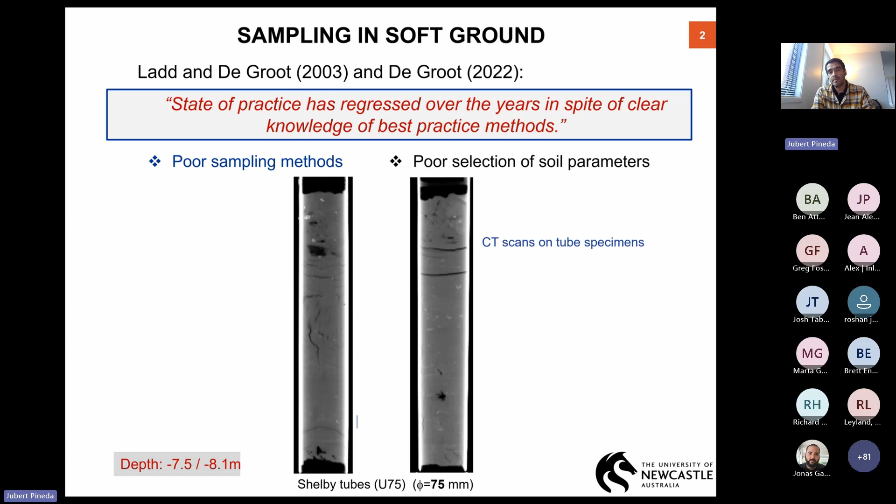But because we are testing these types of materials, which are really bad and highly disturbed, the soil properties we obtain from the laboratory tests we normally run are not good quality. They are not representative of the in situ material.

So if we focus on the sampling techniques available, we have two main trends. We can have block sampling if ground conditions allow and the sampling depth isn't too deep, or we have tube sampling techniques. Within tube sampling, we have two main samplers available: the Shelby tubes, or open samplers, and fixed piston samplers.

In terms of block sampling, we have trial pits, if possible given excavation constraints, and also block samplers.

Before moving forward, I'm going to give my very first conclusion for this webinar. Shelby tubes are not by any means a good option for sampling soft soils. I strongly do not recommend the use of Shelby tubes, and I know that sometimes this sounds a little too strong in practice, but I will try to give proper scientific justification for that statement.

And then I will try to promote the use of fixed piston samplers. I'm not sure how common fixed piston samplers are in regional drilling jobs, but this is becoming quite standard practice in Australia as well.

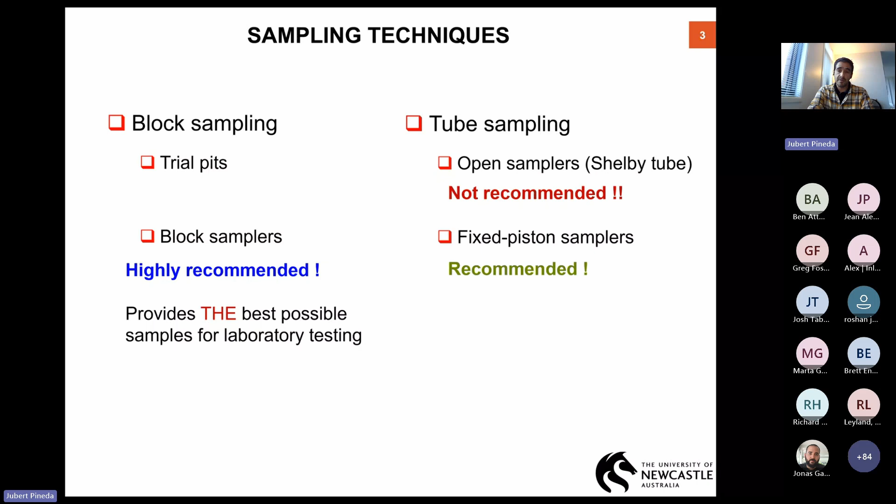And if possible, we do have the possibility to use extremely high quality block samplers. I will highlight the capabilities and operational principles of one option available at the University of Newcastle. I'm going to start with the block sampling techniques.

Now this is the option: the reduced version has a diameter of 180 millimeters. To use it, you need a 200 millimeter borehole. The height of the sample you can get is up to 250 millimeters, from which you can get several triaxial and oedometer samples for laboratory testing. The maximum depth where this sampler has been used is 25 to 30 meters, just because of the drill rig constraint.

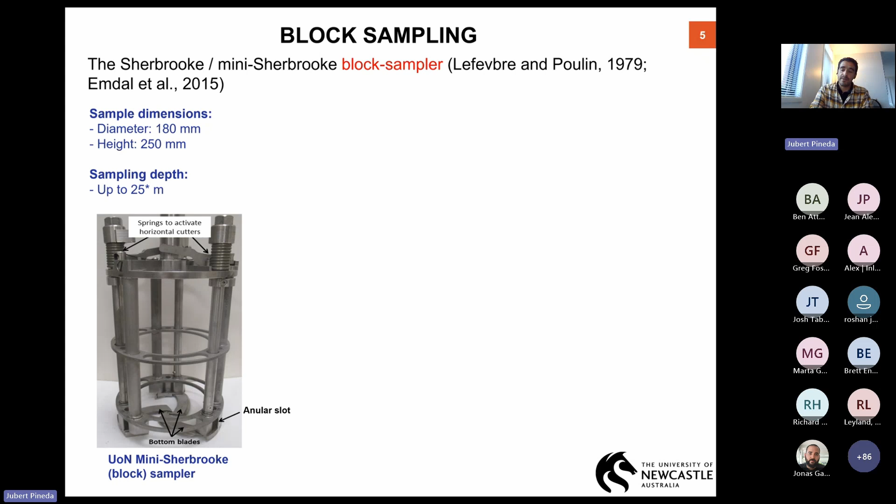But there is no reason why we could not reach deeper depths. How this sampler operates: as I said, we need a 200 millimeter borehole. The sampler itself is composed of a metallic cage you can see here. They have annular slots or horizontal cutters on this side, and at the base we have three bottom metallic blades, horizontal blades.

In order to use this for sampling soft soils, the first thing we have to do is open the bottom blades, allowing the natural ground to get inside this metallic cage. To do that, we use springs located at the top of each column, which let us rotate those blades before the sampler is connected to the drill rods.

Once the bottom blades are open, we connect it to the drill rods and lower the sampler down to the required sampling depth. We have to rotate it at normal speed, though it's preferred to rotate the mini Sherbrooke at very low speed, which is controlled by the drill rig.

So the rotation starts and the annular slots start to carve laterally the soil around the bottom of the sampler until we reach the maximum height that we can reach with this sampler, which is 250 millimeters.

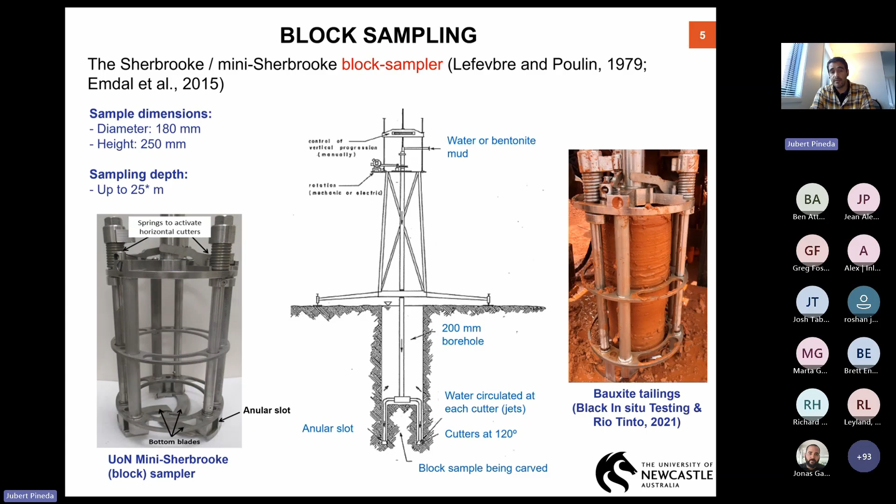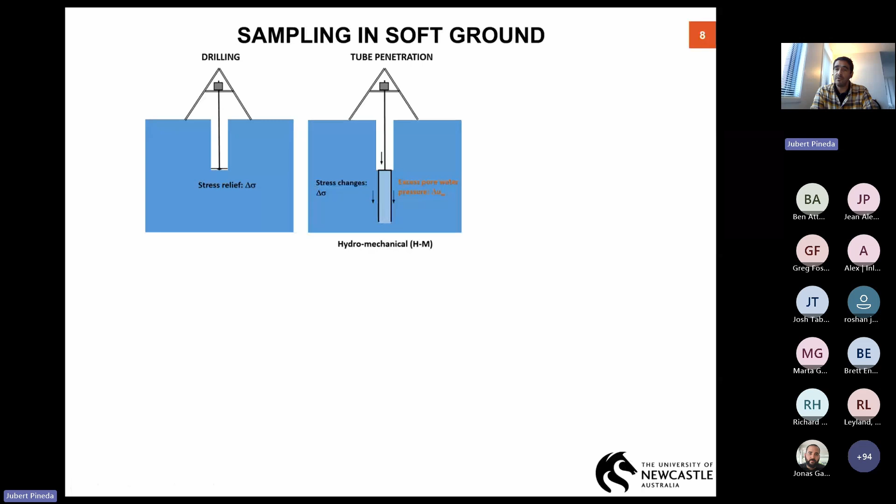Then we normally push a Shelby tube into the ground, and this push must be quick because we want this operation to remain undrained. Therefore, because it's undrained, there is no volume change, but there is a potential excess water pressure that may or may not induce sample disturbance inside.

After that, which in my opinion is one of the most complicated operations in this technique, we need to retrieve the tube with the sample inside.

If we use Shelby tubes, what happens is that when we try to pull the tube sampler from the ground, we create suction at the base of the tube, because we need to cut the base of the soil inside the tube and disconnect it from the natural ground. That pulling induces suction at the base, which induces water redistribution inside the soil. Therefore, we are changing the natural water content and the density in our specimen, and we don't know by how much this suction is affecting our soil quality.

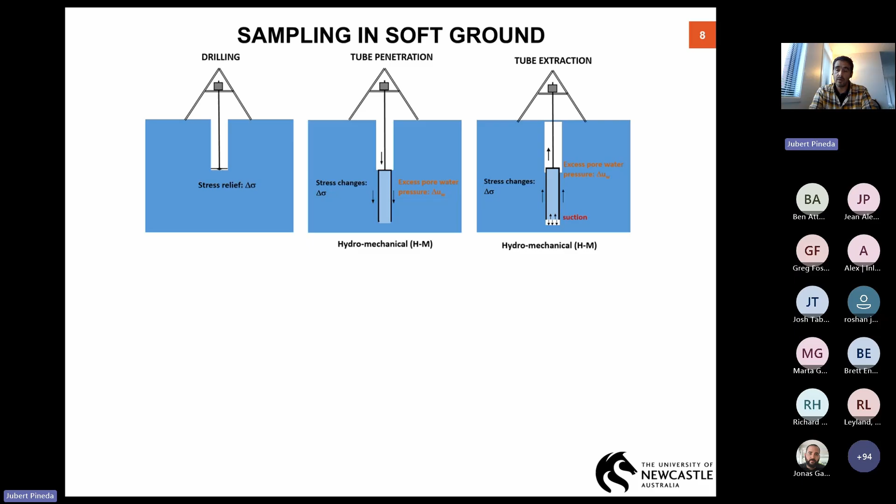But the wax must be liquid or semi-liquid, which means it induces a thermal gradient that travels from the tube's two ends towards the center of the sample, most likely inducing excess water pressure if there is no volume change. If there is volume change inside the soil, because of cracks or cavities, then we also have soil deformation, which changes the density of the natural soil we want to test and from which we want to obtain soil parameters for geotechnical design.

Transport and sample storage: we normally promote keeping the tubes vertically aligned, not horizontally, in order to avoid the natural soil inside the tube from flowing.

We have seen quite a few examples of tube specimens transported and shipped to the lab in a horizontal position. When you try to open them up, they flow like toothpaste, because there are cavities and the soil is allowed to move inside, and that's not good. This also induces negative changes in the natural structure of the soil.

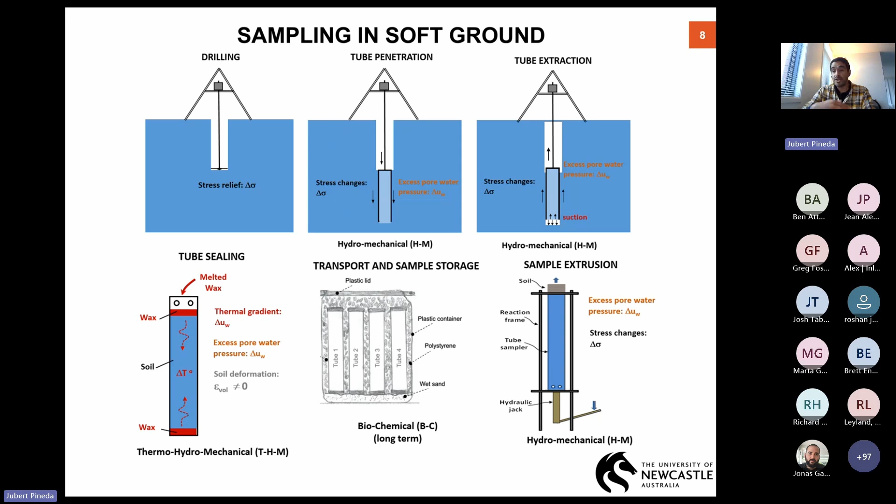Why? Because when we use the hydraulic jack, we need to overcome the horizontal and vertical friction between the soil and the wall, which normally requires quite a lot of force, and therefore we have to compress the natural soil in order to push it out. That is not a good procedure whatsoever. So I will discuss a few options later on.

So what is happening when we run a tube sampling campaign? This is the interpretation from the late Professor Charles Ladd and Don DeGroot in 2003. The soil at in situ state is located in position 1. Under ideal conditions, if we were able to test the soil in situ without taking any sample, under triaxial conditions, running a K-naught consolidated undrained compression test, without taking the soil from the ground...

If we imagine we could place a big triaxial machine inside the ground and run the undrained triaxial test, the stress path followed by that sample would go from point 1 to point A. We know that because natural soft soils are slightly over-consolidated, this generates positive excess pore water pressure during undrained shearing, and therefore the mean effective stress reduces, and the maximum deviatoric stress or undrained shear strength we could get would be indicated by point A. However, we can't do that.

So what we normally do is we basically drill a borehole, then push the tube sampler inside the ground, and we have to pull the sampler from the ground, then seal it, transport and store that, and then extrude the soil from the tube in the lab, and then prepare the sample for laboratory testing.

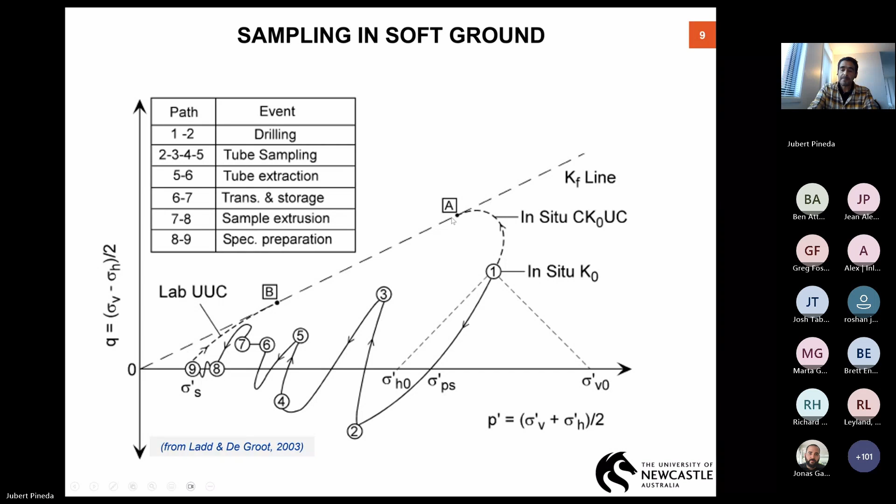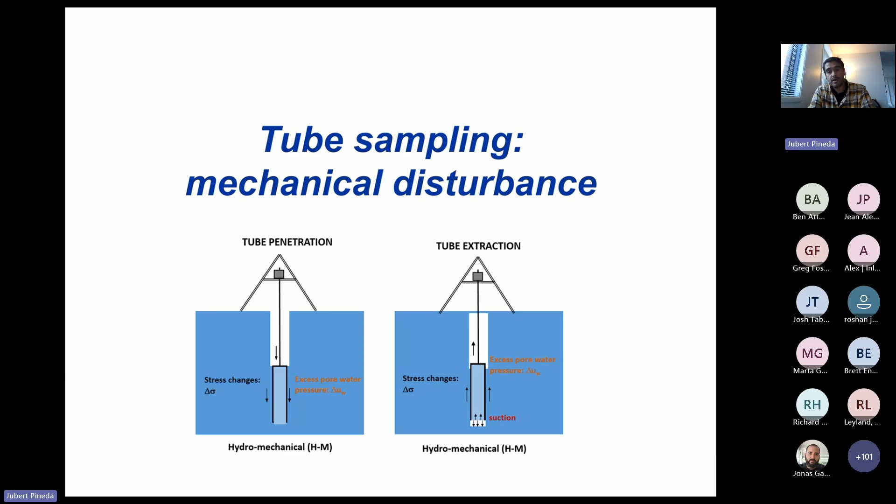So let's discuss briefly what is the disturbance coming from different sources. The first and most important disturbance identified is the mechanical disturbance due to the penetration of the tube sampler into the ground. This is a really old problem in soil mechanics. I'm not saying this is something we've recently discovered, by no means. This was originally discussed by Hvorslev, potentially the Bible of in situ testing, back in 1949.

So Hvorslev and many other researchers came up with a 500-page book or guideline, and they proposed geometrical descriptors in order to minimize sample disturbance in practice, to improve the reliability of the soil properties we normally obtain from those samples. So they proposed a few descriptors.

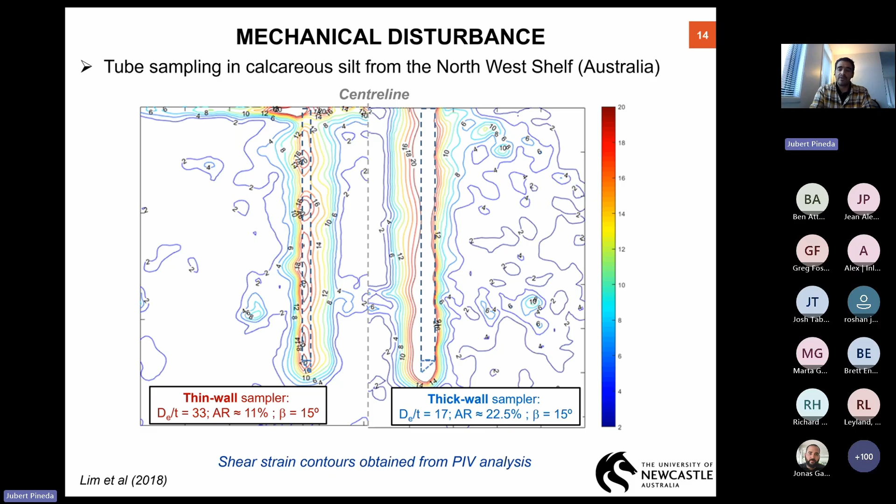So this is already bad enough, and practitioners should try to move on towards a different technique. But this is just during the penetration.

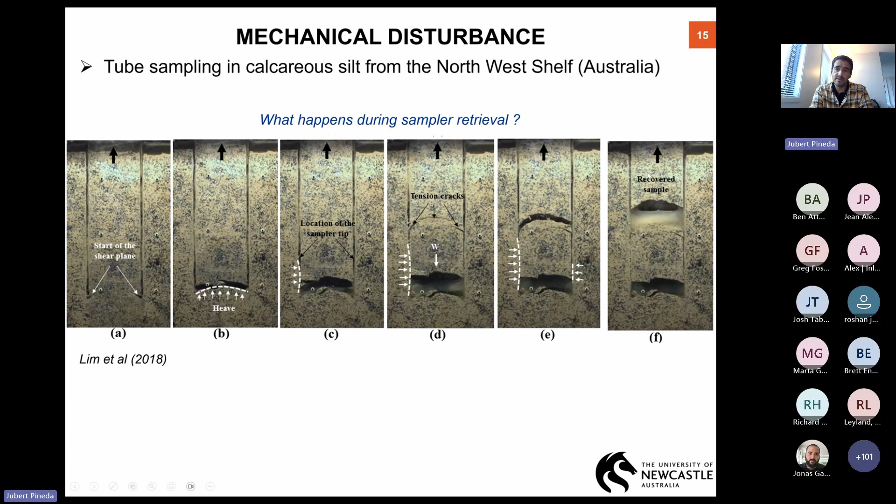So that creates some tension cracks. The tip of the sampler is now here, and because of the self-weight of this part of the tube, we are losing this bottom part of the material. This is the recovered sample that we got and we are going to test. So by no means are these Shelby tubes or open samplers a good technique.

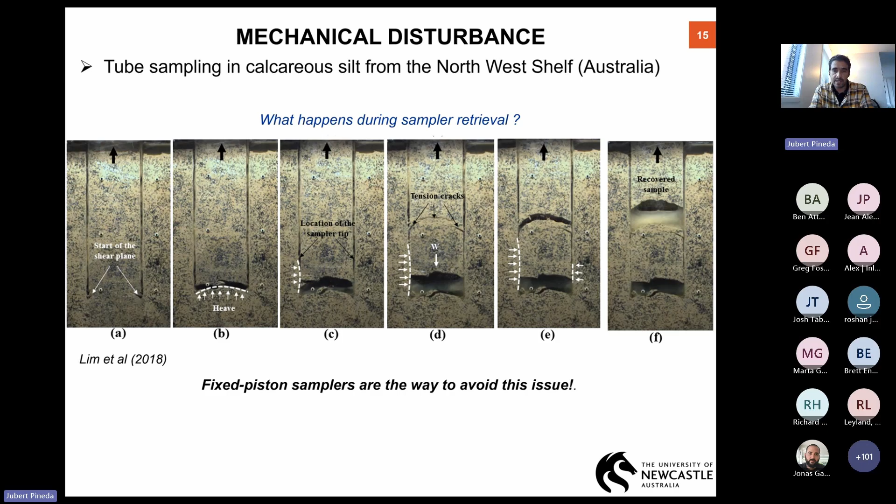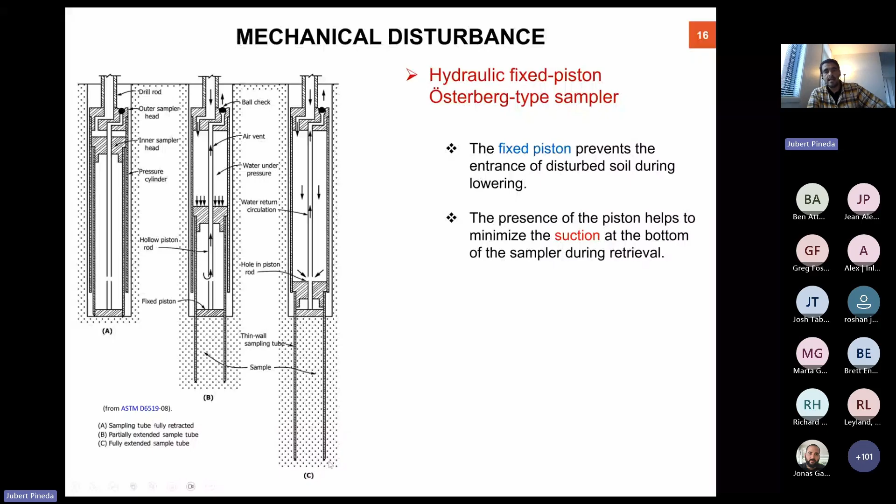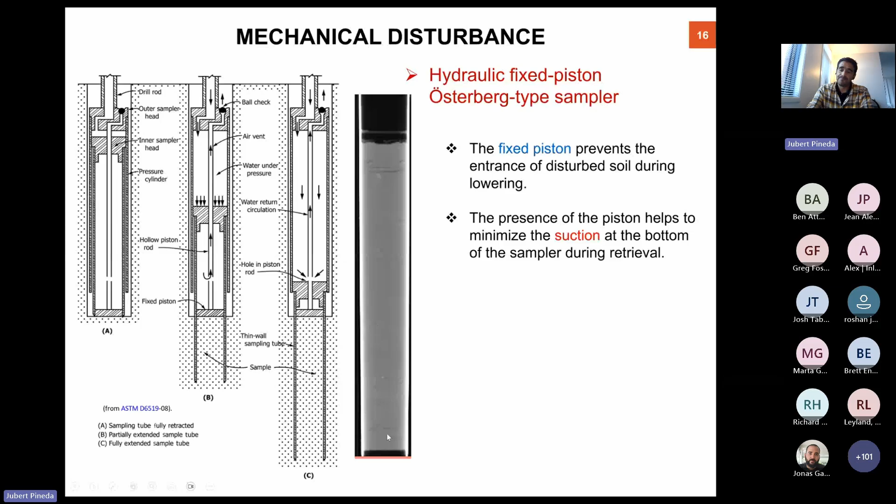So there is no way we can reduce this sampling disturbance to zero, but using fixed piston samplers, we reduce the disturbance in the central part of the tube, and also only get some disturbance at the top and bottom ends, which is quite good. Just briefly, what happens after retrieving the soil and then sealing the sample?

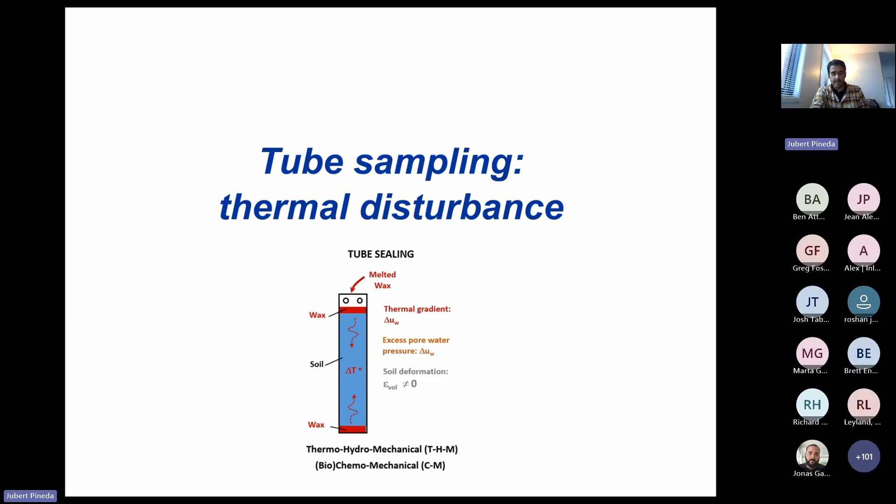We normally use wax, and we have studied carefully the influence of waxing on sample disturbance. This is a photograph I took in Spain, but I have seen similar stuff in Australia and also in different countries in South America.

When we normally use wax, we need to melt the wax down and then pour it to cover the top and bottom ends. This photo on the right shows liquid wax. The operators in this case decided to include some plastic bag in order to separate the soil from the wax, which is not bad.

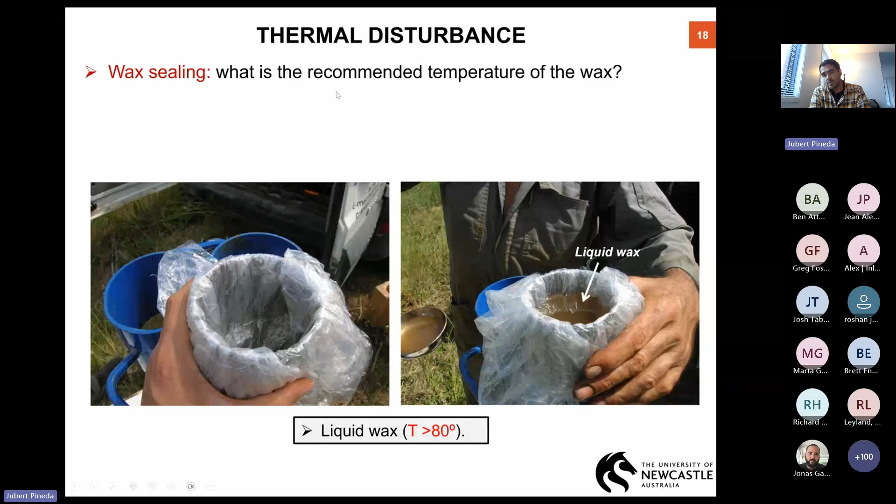Something I noticed was that the temperature of the wax was around 80 degrees or higher, which is quite large. So the question is, what is the recommended temperature for the wax before using it for sealing tube specimens? If you check the International Manual for Sampling of Cohesive Soils from 1981, or the Australian Standard, there is no recommendation whatsoever about that. Nobody pays attention to that.

There is a recommendation for the temperature of the wax in the ASTM standard, and in the book by Clayton from 1995, which is quite useful. They recommend that the wax should have a maximum temperature around the melting point, very close to it, which is 55 to 60 degrees, not 85 or 90 degrees, because that's too liquid, too hot, and it creates a lot of thermal gradients.

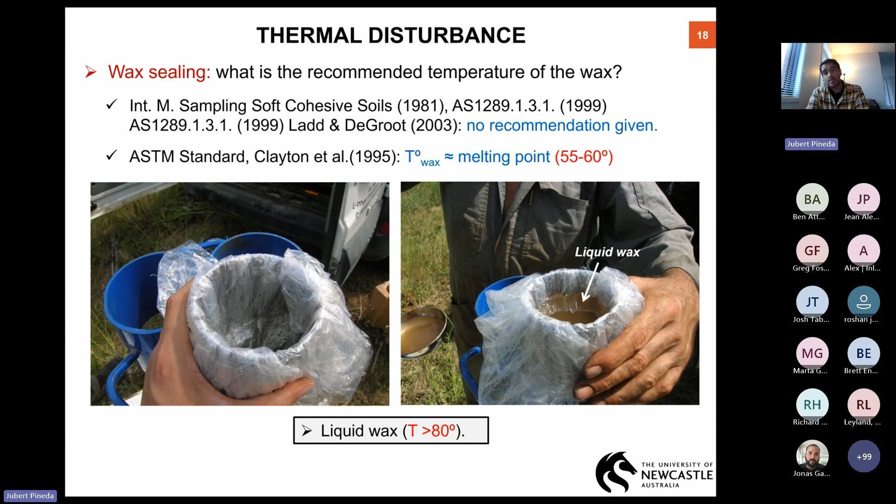We have done some experiments in our lab to see what happens inside the soil when we wax the tubes. We went to Ballina, took some additional tube specimens in Ballina clay, and then cut them into halves. The maximum length for this sample is 250 millimeters, basically half of a standard Shelby tube, if you want to call it that.

We waxed it under controlled conditions, putting a cake of wax of 30 millimeters max. Then we installed some sensors at the base, pore pressure sensors called UW4, and thermocouples to monitor the temperature inside the soil, as well as thermocouples attached to the tube wall. We also installed three tensiometers, UW1, UW2, UW3, located at different depths in order to see what happened.

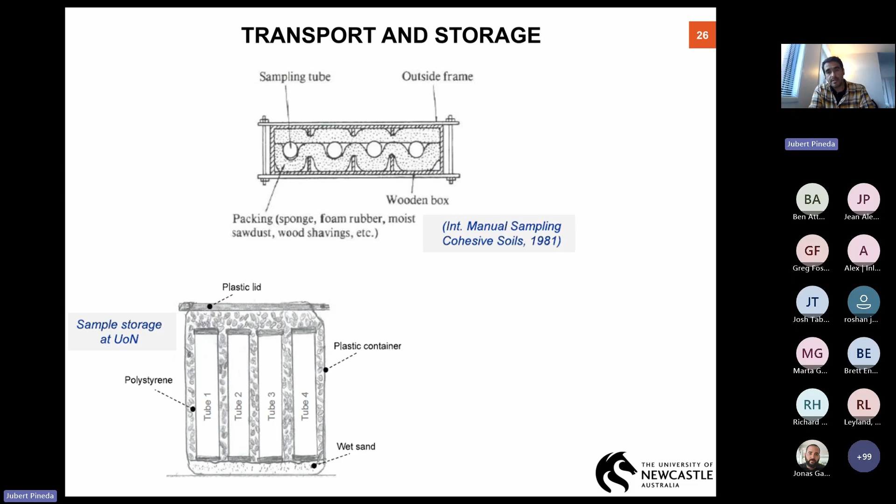So a little bit more on sample preparation. Sample preparation is also something that is overlooked, in my opinion. We normally ask technicians to take care of that without checking that the procedures are useful and may produce reliable specimens.

We normally slice our tubes. We don't recycle our tubes. This is something that sometimes is a little bit shocking for practitioners, but it's the best way to prevent additional sample disturbance. As you can see in these photos at the bottom of the slide, we slice the tubes using a mini grinder to just cut the tube.

If we need to run a triaxial test, and the triaxial sample is 50 by 100 millimeters, then we cut 150, 160 slices from the tube. To cut the tube we use the mini grinder, and then we use the wire saw to cut the soil inside. You see two examples of this process, and we also use stainless steel tubes all the time.

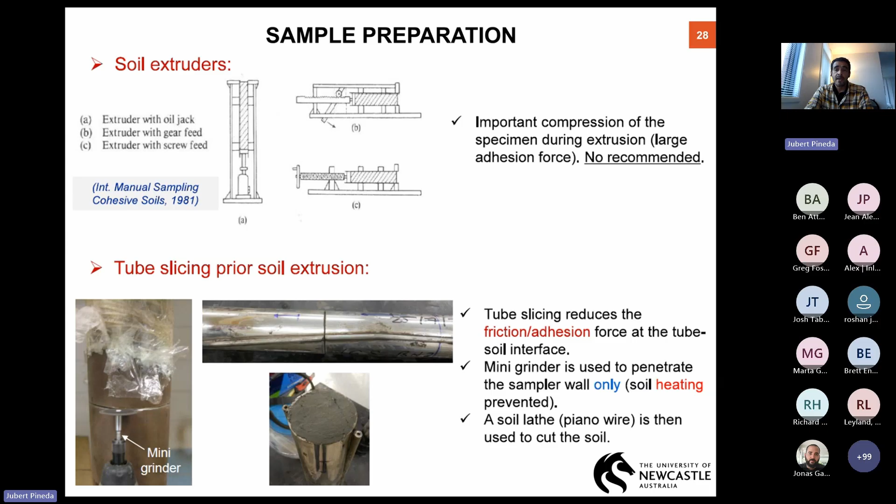We don't use this one - at the bottom left-hand side is a rusted, non-stainless steel tube, and this was a test that we did on purpose in order to check the chemical reactions induced by using those tubes. So once we have our slice ready, we need to push out the soil.

At the bottom you see what we have done in Ballina, our test on Ballina clay, because this material is quite soft, and if the tubes are not really, really old, the soil hasn't developed any chemical reactions or bonding between the soil and the tube. Therefore you just need to put a small plate, a piston at the base, and then push a little bit with your hand, and the sample will naturally stay there, and you'll be able to slide down the tube without any problems.

In the example at the top of the slide, this is more for medium to dense silty samples from Barcelona. In these cases the pre-consolidation stresses are higher than 200 kPa, and the soil is quite stiff, so we had to produce or design this extruder system, which is very simple.

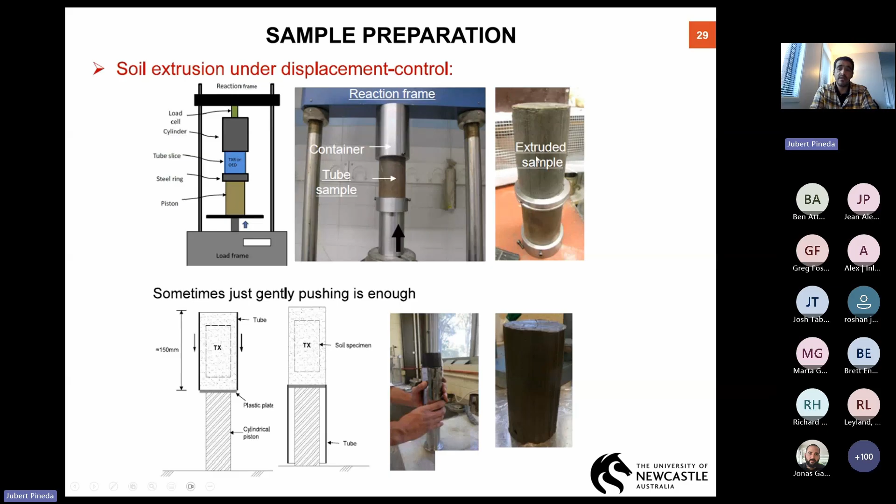It's just the slice - we put it in the middle, we have a piston, and then we just use a load frame in order to push out the sample, and we maintain it in a container, which is just an external tube that holds the sample in place. So this is a photo of a sample that we have extruded with this method. In that way, we minimize further the potential disturbance due to sample preparation.

MIT back in 2003 proposed this method, which is used after slicing the tubes. You can use a wire saw or a hypodermic needle to penetrate into the soil and break down all the bonding between the wall and the natural soil. You can use the needle alone to break these bonds, or use the needle and then the wire, rotating it to break down all this bonding.

That method works. We have used it a few times for shorter specimens, but for triaxial samples, it's very difficult to maintain the alignment of the hypodermic needle without cutting the soil. So we have decided not to use this on standard testing procedures here, but it's also useful if you have the right tools to do that.

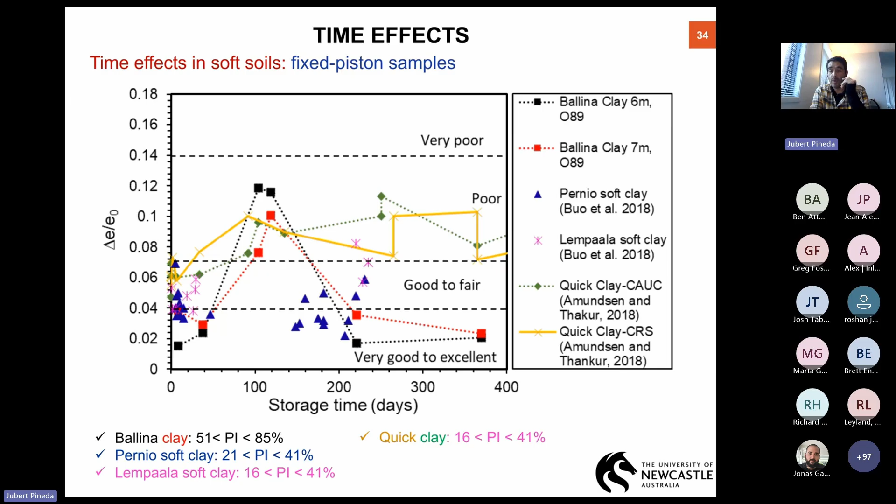If your soil is low plasticity, like the ones you can see in this photo, we see results from quick clays in Norway, in Sweden, and also soft clays in different places. The trend for storage time to induce an increase in this ratio delta e divided by e0, which is the sample quality index I'll explain in a minute, is basically more important in low plasticity clays. If your sample is high plasticity, you can store it properly and test it after even 1 year or more without too much change in the mechanical properties previously mentioned.

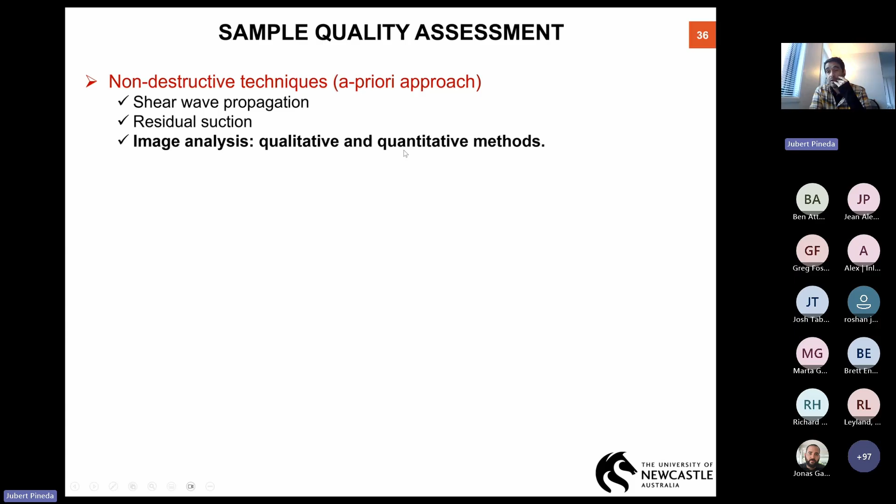How can we evaluate sample quality - this is potentially one of the key messages of my talk today. There are 2 main trends: non-destructive techniques, which are good because we want to check if our sample quality is good enough before doing any test. I'm going to highlight only one, which is the image technique for qualitative and quantitative analysis we have developed at the University of Newcastle based on CT scans.

But the more standard procedure is based on mechanical tests. These tables basically summarize the methods you can use in practice. The first table on the left is the original procedure proposed by NGI based on volumetric strain. I'm going to discuss briefly the second table on the right-hand side. People from NGI, Tom Lunne and co-workers, proposed an index, a sample quality index, which is basically delta e divided by e0.

We need to quantify how much change in void ratio is required to recompress the soil from 0 kPa, after putting the soil in the equipment, to reaching the in situ vertical stress. If we can quantify this delta e, the void ratio required to recompress the sample to the in situ stress, and normalize it by the initial void ratio of that sample, we can classify our sample quality into 4 main categories, depending on the OCR.

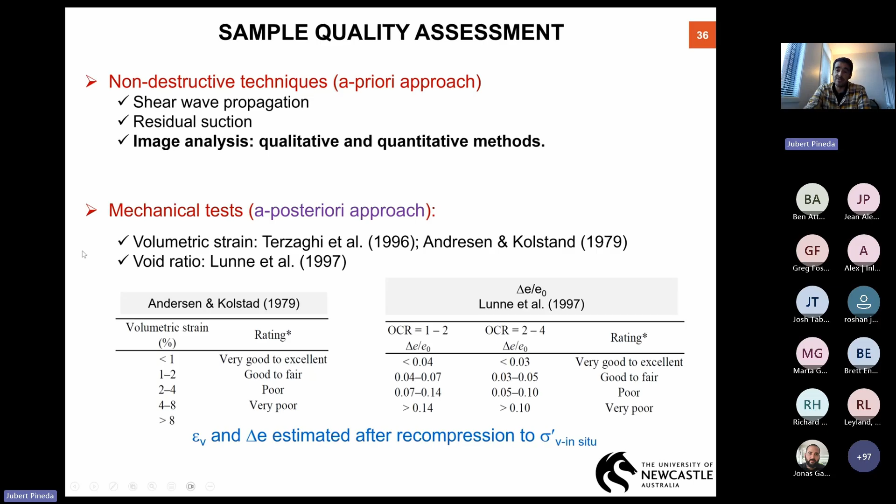If our samples have OCR 1 to 2, and this ratio is lower than 0.04, the sample classifies as very good to excellent. If this ratio ranges between 0.04 to 0.07, the sample is good to fair, which is basically good enough for mechanical testing. But if this ratio is higher than 0.07, your sample is bad to really bad, so you should not use those results for design. That's what you get in practice, and this method works quite nicely. The main problem is that you have to run the test before and after - only then do you realize if your sample is good enough or bad.

This is an example of using that method. In Ballina, back in 2017 and 2018, we took specimens using the Sherbrooke sampler, the block sampler. We used the fixed piston sampler in red. We used two different samplers: a free piston sampler, which is the P100 in black, and then the standard Shelby tube, 75 millimeters.

You see the compressibility curves from the oedometer test. They are far different, particularly between the Shelby tube, which is this gray line, and the other samplers. The stars indicate the estimated pre-consolidation stress, and you see that the block sample and the fixed piston sampler give you more or less the same pre-consolidation stress. The P100 gives us lower, and the Shelby tube gives us a value which is lower than the in situ stress, which is not possible.

If we derive this compressibility curve, because this is a constant rate of strain test, we can get the evolution of the compression index with stress level. You see that the compression index, because of the S shape, is not linear for the block and for the fixed piston sampler, it's highly nonlinear in this part. You have a CC that reaches values up to 3 in the block sample, up to 2.25 in the fixed piston sampler, and only 1.25 in the Shelby tube.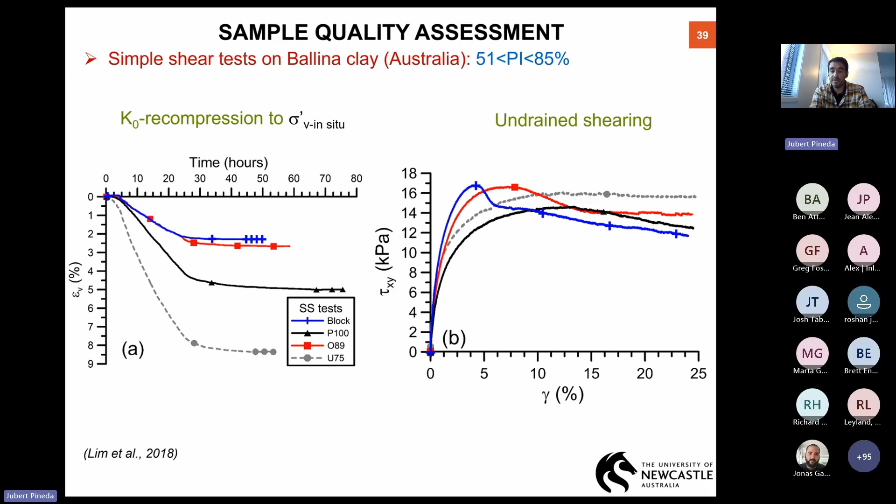But then when you shear it, the peak values under undrained shearing are not that different. But this is a potentially misleading result. The reason is we have more or less the same tau peak between the Shelby tube and the block and the fixed piston. The reason for this similar value is because the sample has been recompressed to the in situ stress. If you don't recompress your Shelby tubes, you are going to get much lower values under shearing. So recompression is definitely a good option, but still Shelby tubes should not be used because they don't reflect the real soil response.

So we have used this index from NGI, delta e over e0, for all these samples that we have tested. This is based on the pre-consolidation stress. According to this index, the only two samplers that provide good quality, excellent quality samples are the block sampler and the fixed piston. The free piston is more or less good in this case, and the Shelby tube gives us very poor sample quality.

The M modulus, the oedometer modulus, the same thing. Only the block and the fixed piston give us high quality specimens, and the Shelby always gives us very poor sample quality. In terms of the simple shear, more or less the same, the Shelby tube gives us poor sample quality.

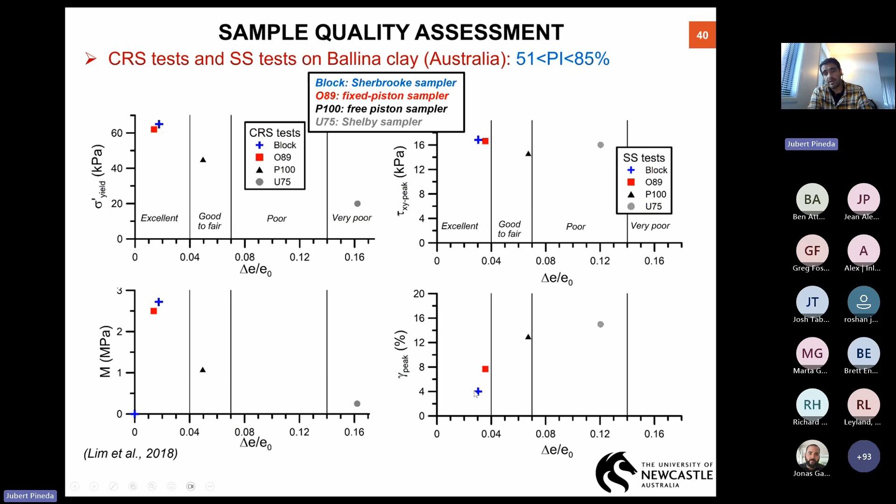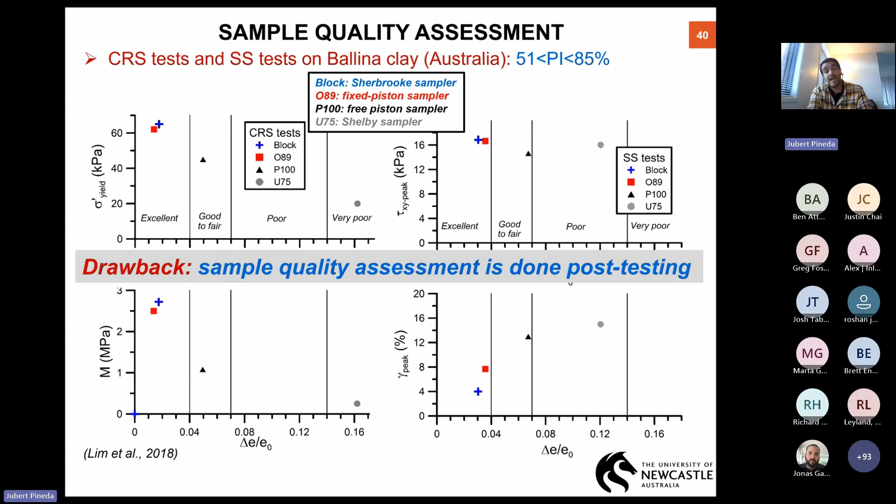The main problem with this method is you need to run the test, and at the end of the test, you realize if everything you have done is good or bad, which is definitely not good. So that's why we are proposing a different method.

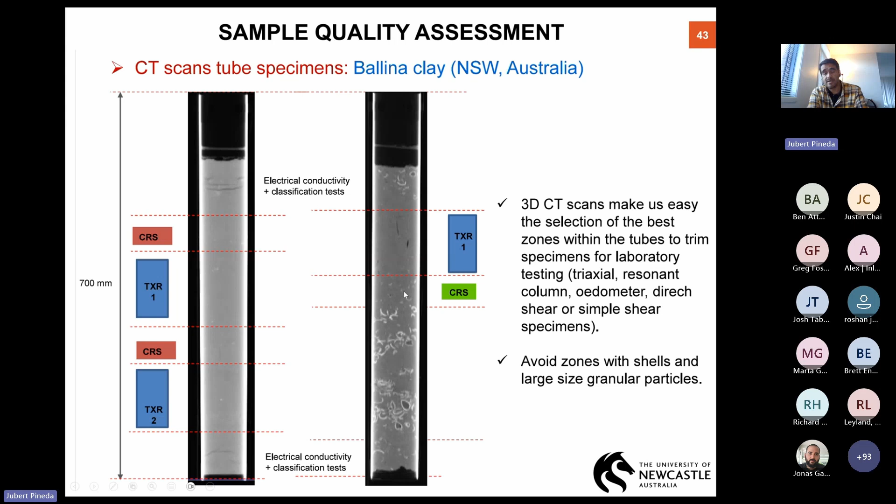So we have the CT scan, and then we decide where we can trim samples for oedometer test or CRS, and also triaxial test. We can also detect the presence of shells or cobbles or any other stone that you cannot test in the lab. So for this tube, you decide to run only one triaxial and one CRS, that's it. The other part of the tube cannot be used.

What is the implication of sampling disturbance in geotechnical practice? I'm going to use one of the simplest examples we have. This is part of Geomechanics 1 or any geotechnical soil mechanics 1 course: the settlement analysis of embankments on soft ground. We'll keep it as simple as possible.

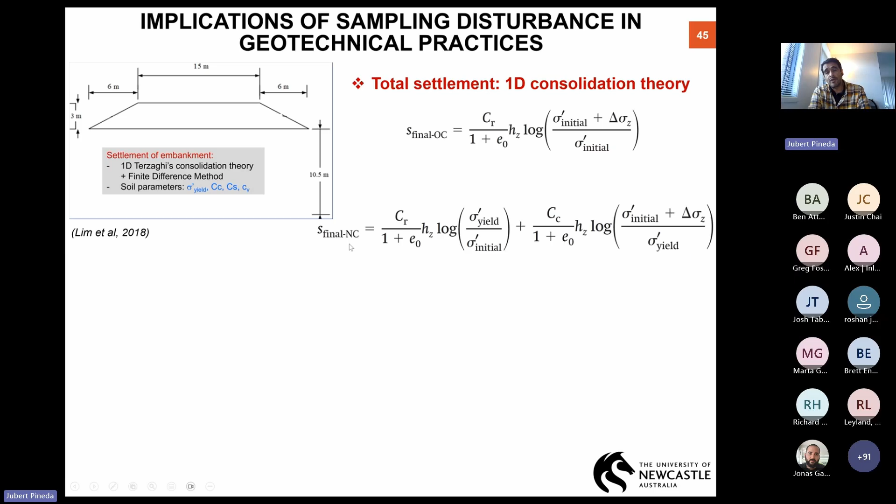To analyze this in an Excel spreadsheet, you only need to use 1D Terzaghi consolidation theory, and then potentially finite difference method to calculate the excess pore pressure. If you check Terzaghi's consolidation theory, these are the two equations you have to use. The total settlement for over-consolidated soil is given by the equation at the top, and the total settlement for normally consolidated soil is given by the equation at the bottom.

If we use the finite difference method to estimate the evolution of pore water pressure, that can easily be typed in an Excel spreadsheet. Then we have this equation where we have the parameter beta and the Cv as input parameters from the soil. This analysis is very useful in Australia because we construct embankments for roads and rails all the time, and this is a really simple way to do it.

So we need to obtain 4 parameters from the lab, and I haven't discussed creep here. I'm not going to include creep, but C-alpha is also a key factor. We need the recompression index CR, the pre-consolidation stress or yield stress, the CC, and the Cv to calculate the pore pressure.

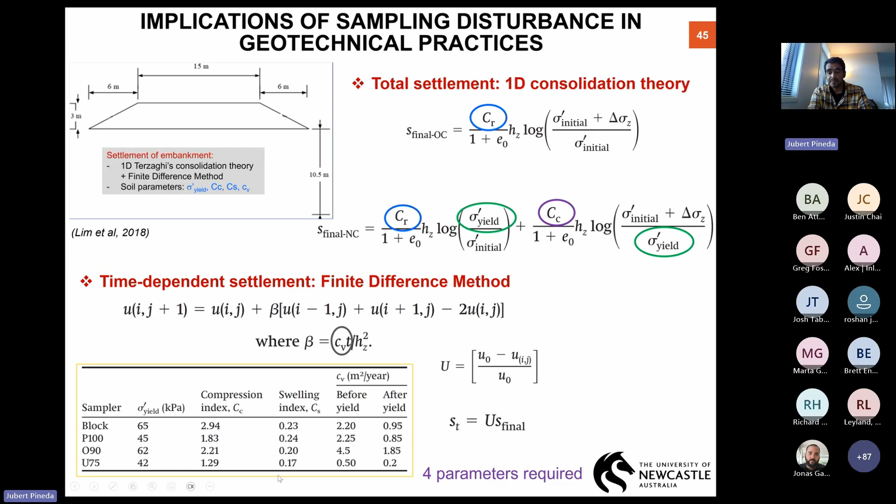So what we did back in 2018: we collected those numbers from the tests I explained before, done on block specimens, on free piston sampler P100, on fixed piston sampler O90, and the Shelby tube U75s. You see the numbers for each property change because the sample quality is different. But we did this analysis to calculate the estimated settlement based on those parameters.

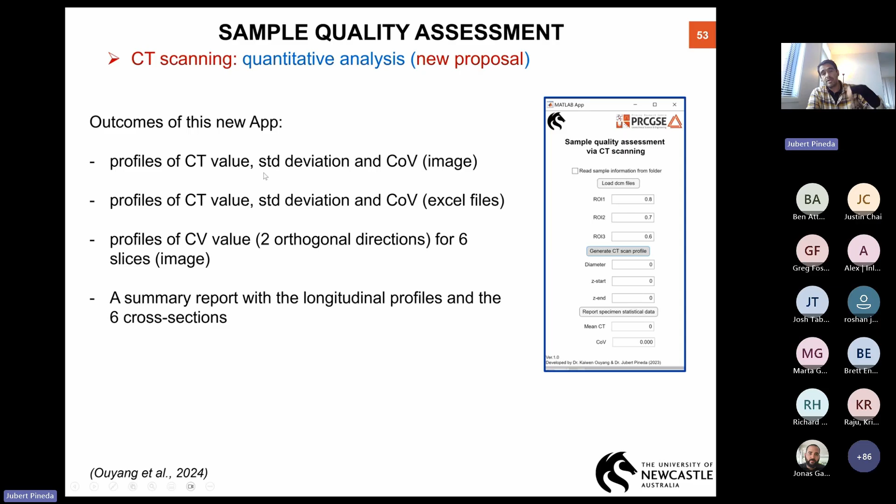If you use the app, you have the possibility to get profiles that you can download and plot yourself, and include in any report you want to provide to the client. But how do we know that this works?

Remember I discussed a few minutes ago the index proposed by NGI, which is delta E by E0. We did all this analysis long ago for all the tests we've done on Ballina, and we also did all the CT scans.

So the method we are proposing is a priori, meaning you don't need to wait until the end of the test to realize your sample is good or bad. The coefficient of variation can tell you before testing whether your sample is good or bad quality for testing.

We now have an agreement with our CT scan facility in the School of Health at our university to run CT scans for commercial purposes. So if we have a client interested in checking the sample quality of tube specimens, the client can ship the samples to us, we'll run the scan in our scanner here, and then ship the samples back to the client for testing.

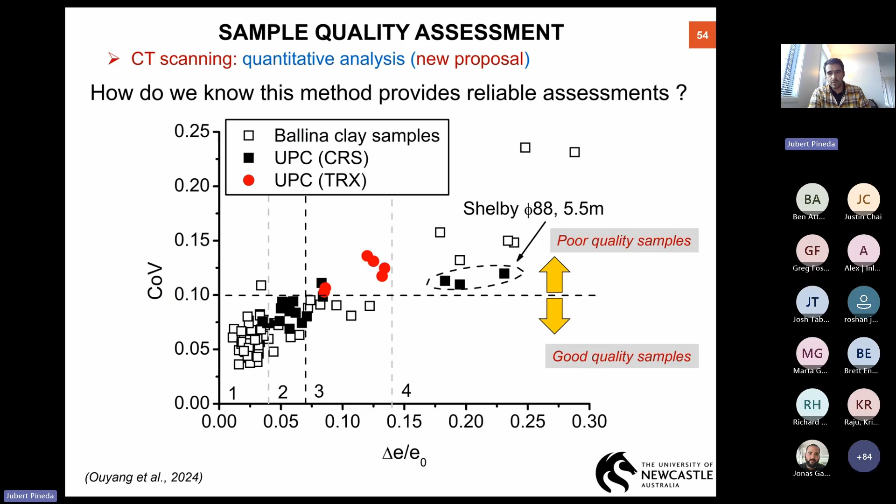All right, so the approach is based on this. COV higher than 0.1 is, in theory, a poor quality sample - don't use it for mechanical testing. Lower than 0.1 is good quality - you should use it for mechanical tests and definitely for design.

So the final take-home message is basically that sample disturbance must be recognized as a process where we have many factors that may induce negative impacts on sample quality and therefore on soil properties.

Shelby tubes should be avoided. I strongly recommend don't use them, just in the standard version. So you can use it as part of the fixed piston samplers. Fixed piston samplers should be used - it's by far much better than Shelby tubes.

In cases where there is room and money to use the mini Sherbrooke, we are more than happy to collaborate with industry, providing our block sampler for this type of job.

And finally, we are proposing a new method that hopefully could be adopted by many practitioners, and we can try to, all of us, move forward to a better practice in Australia. All right, that's it. Thanks for listening to me, and I'm more than happy to answer questions about this topic. Thank you.

Thank you, Jubert. Amazing presentation as usual, a lot of interesting information, very practical as well. So yes, all the attendees will have gotten a lot of value from it. We'll go now through the questions.

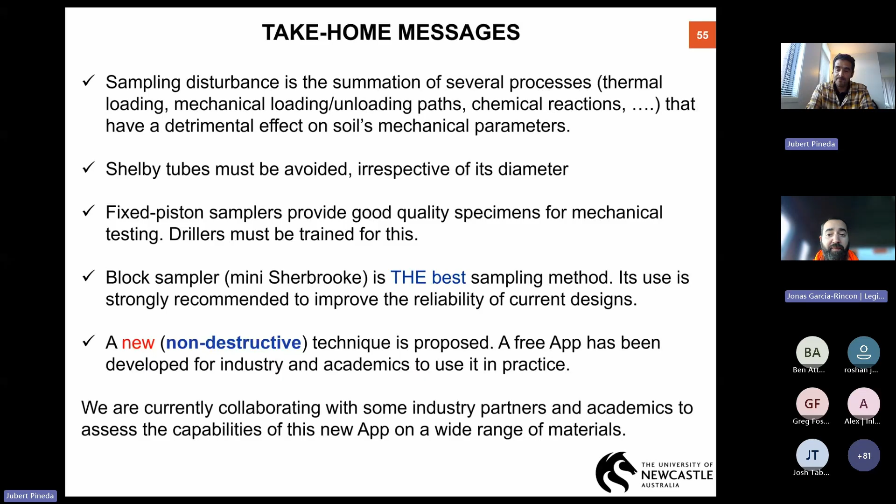I'm going to start with one that was actually the last one that was made, but it's related to one of the slides, slide 50, about sample quality assessment. Robert is asking about slide 50. I'm not sure if it will be this one, I think it will be... I guess it's 51, maybe 49.

I was asking what happens at around 210 millimeters - I cannot see a visual reason for the spike. Okay, good point. So that spike is in between - you can see at the left-hand side we have photographs, slice 1, slice 2, and slice 3. 210 is basically close to slice number 2. So if we go here, slice number 2 and slice number 3, we may see some white dots here - so it's potentially a shell. If we have a shell in there, or a cable or something that has much different density with respect to the natural ground around it, that is going to produce a spike.

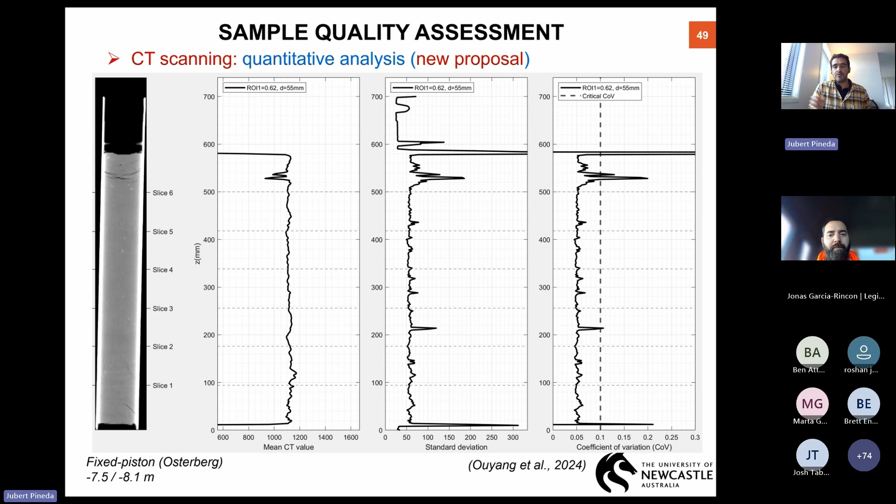By no means should this be reflected as sample disturbance. No - sample disturbance is when you have spikes that also shift the COV profile towards the right, producing something much more heterogeneous, much more random profiles of COV and standard deviation. This is when you see, oh my God, this is something that is not uniform. Although the CT profile on the left-hand side is kind of similar, kind of homogeneous, when you check the standard deviation and the coefficient of variation, you see a lot of weighting. And this is where it becomes complicated, because most likely it's due to sample disturbance, cracking. You can check the slices, the cross-section slices, to see if there is any shell. If there is any shell, then this is not sample disturbance - it's just natural composition.

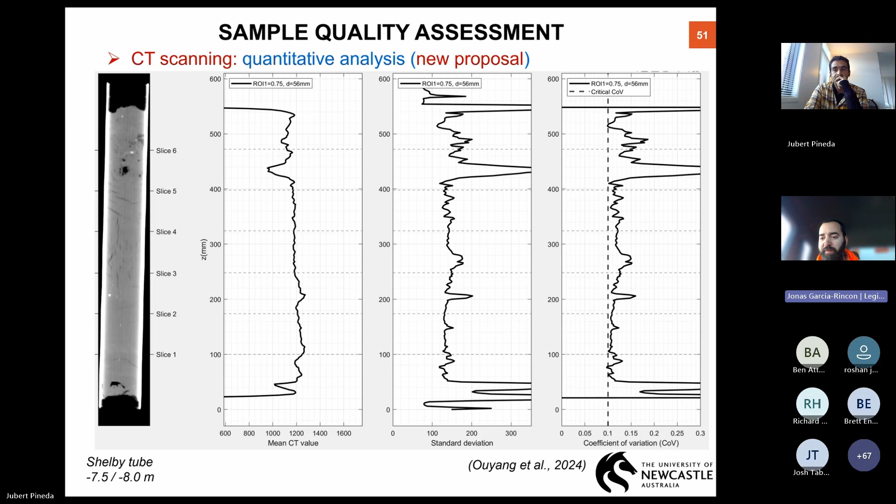First one, I guess, will help highlight a bit the differences between block sampling and tube sampling. Really, from Alex, he asked: what is the area ratio of the in situ block sampler introduced in the first few slides? From the sample photo, it looks large.

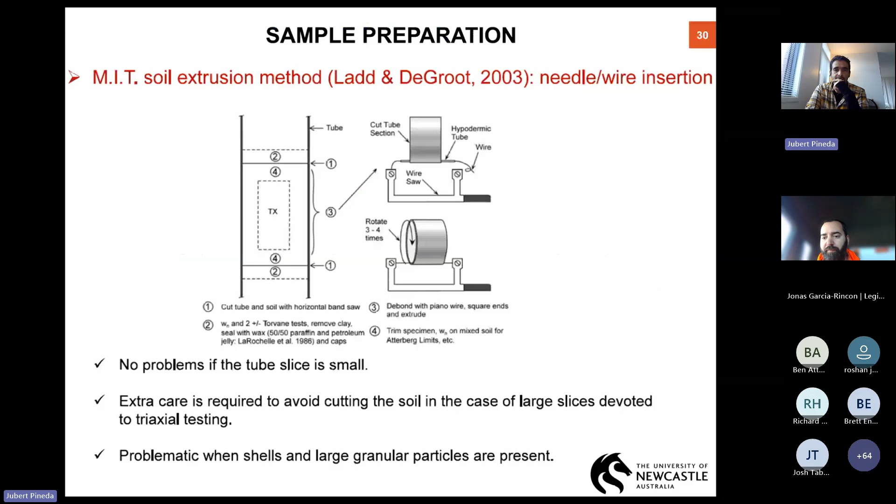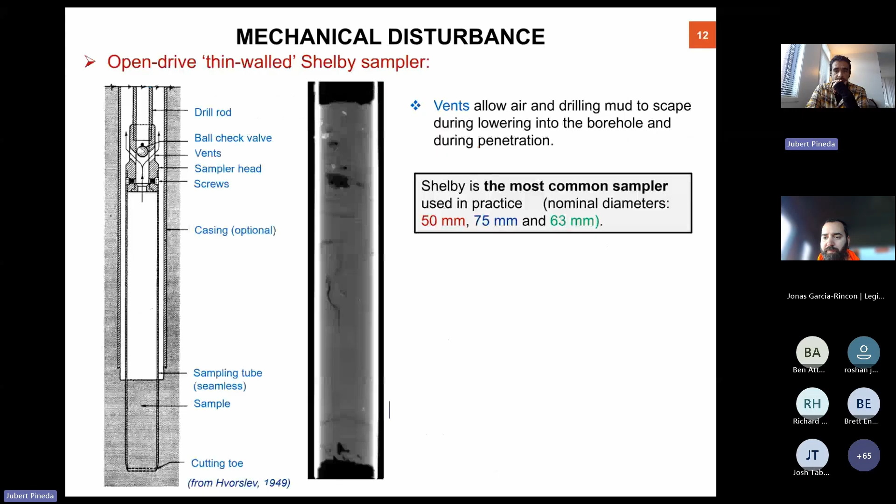The area ratio for the block sampler has no meaning, it's not an important factor. The area ratio is basically the ratio between the external and internal diameters, but that only matters when the sampler is mechanically pushed into the ground, because pushing induces compression and extension paths inside the soil. The block sampler is gently carving at the bottom, not inducing any compression and extension paths, so the area ratio has no meaning for block samplers.

In addition, remember the mini Sherbrooke has 180 millimeters in diameter, so you have room to trim all the peripheral area in the block, which may have water distribution or imperfect sealing with oxidation around it. You just trim it down and the center is perfect. So they are far different. If there's any room for you guys to use the mini Sherbrooke mini block sampler, use it, it's much more beneficial.

I guess you already know this. Black In Situ, after using our block sampler, bought 4 block samplers and are using them in many different places in Australia. I also received an email last week about another company interested in buying one. Our approach is we don't want you guys to buy something without understanding how the sampler operates. We are more than happy to lend our sampler, though of course if you break it, you have to pay it back to us. But we can provide some guidance for you guys to use it.

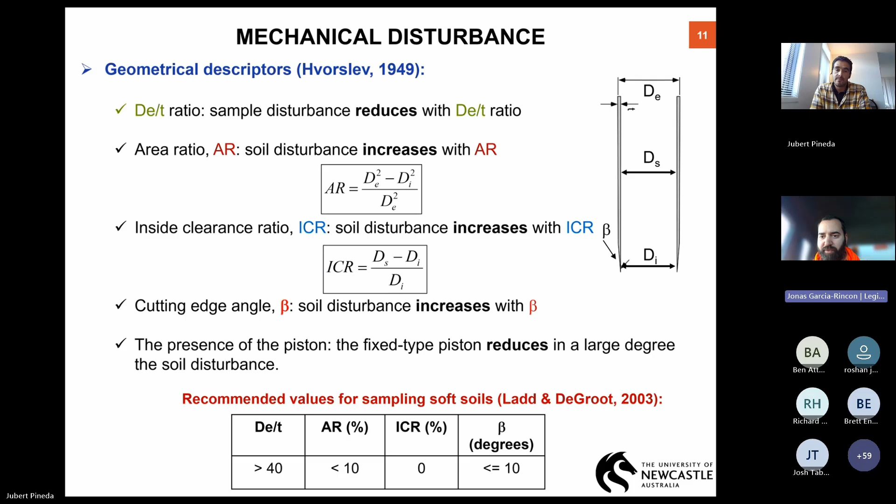Jump to another question from Christian. He asked, hi Jubert, in terms of the wax sealing, while it looks like a very good idea, what is the likelihood that something like this is implemented, given how most companies are trying to sample as fast as possible to fit inside a budget and timeline? And if I decide to start doing it, how much time does it take to wax seal one tube?

The waxing is quite fast, meaning you can wax specimens in 5 minutes. Well, you can wax them, but then you need to let them dry out, because you cannot place it in the containers for transporting without allowing the wax to be solid, otherwise it's going to crack down. So there are 2 things about the waxing. One is that pure wax cannot be used, because pure wax cracks with time, so you have to combine it with 50% wax, 50% Vaseline, because the Vaseline is more ductile and the cracking doesn't happen.

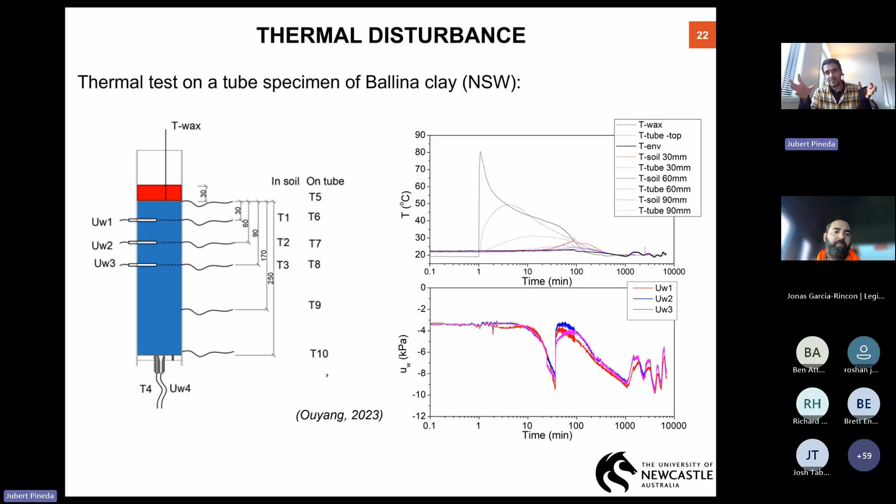What is really important is to keep this foam plate in between the wax and the soil, otherwise the wax is going to heat up the soil, and that may induce some oxidation. If your soil has a lot of organics, that is going to trigger chemical reactions in the soil. So it takes 5 minutes to wax it, and then you have to let it dry out, flip the tube, wax top and bottom ends again. It's something you can do in parallel to many other activities you are running, but the wax produces some pore pressures, so you need to isolate the soil from this wax gradient.

I'll ask one question related to this now, just before that - I don't know if you mentioned it in the presentation because I missed a few minutes. Do you have any preference in terms of type of wax? Some people use microcrystalline wax, some use paraffin wax, sometimes a mix of paraffin and beeswax.

Paraffin wax is paraffin wax. So the recommendation is paraffin wax mixed with Vaseline, because the Vaseline gives the ductility that you need. Perfect. So yeah, another question...

from Alex Wang. He said, if we plot the wax temperature induced pore pressure change on top of the QP stress path during sampling, extracting, and so on, how much will the extra pore pressure alter that stress path? That's a very interesting question, and this question is twofold in my view.

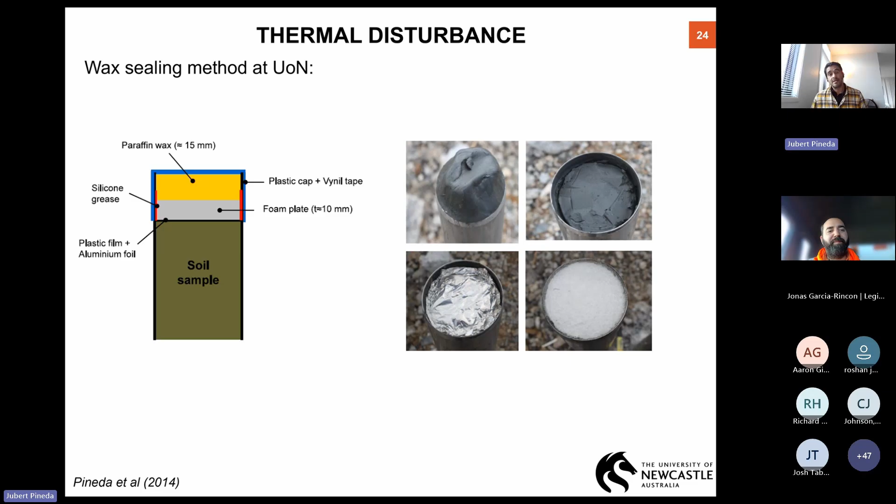Just to conclude, at the end when I described this app and the CT scan way to analyze sample disturbance, just so you guys know, in the agreement we have with our School of Health, there is a standard price for practitioners to use the CT scan, or for us to do the CT scans for industry partners, which is $300 an hour. In an hour, you can scan 20 tubes, or get 20 CT scans done. So that's the price for commercial purposes.

If anybody is interested, you just need to contact us, and then we can organize the delivery and try to help as much as we can. And regarding this, I think somebody asked it, the same person who asked about the De Jong 2018 method, he was asking where he can find the executable for this software.

At the moment, what we are doing is expanding the capabilities of this app, not only for tube specimens but also for block specimens. That's why we originally uploaded it to our webpage, and then we closed access because we are improving the capabilities. At this point, if you guys want to use it, you just need to send me an email and we will send you the exe file to use it. But in order to use it, you have to have the scan, so it's a conversation we have to have if you guys want some help with the CT scans as well.